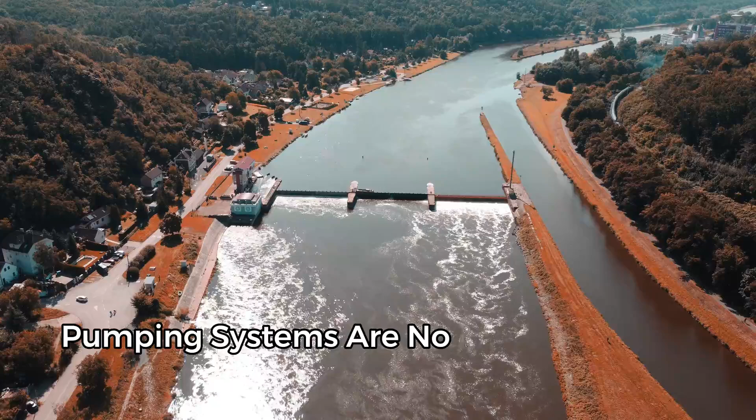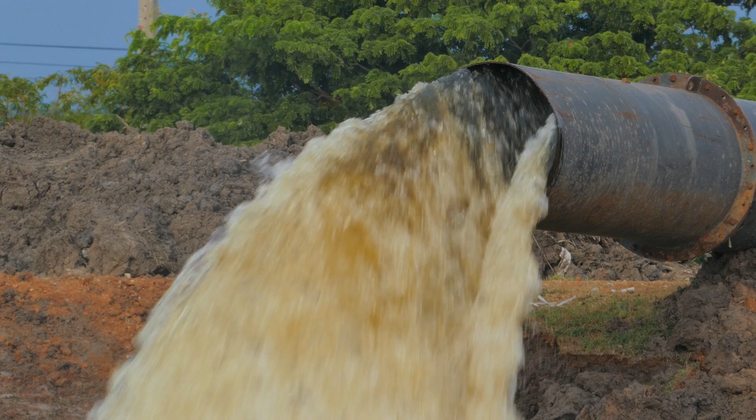Water looks simple when it flows, from a river to a reservoir, from a treatment plant to a city tap, from an intake to a cooling tower. But behind every quiet stream in a pipe, there is a machine working, and behind every machine, there is energy being spent.

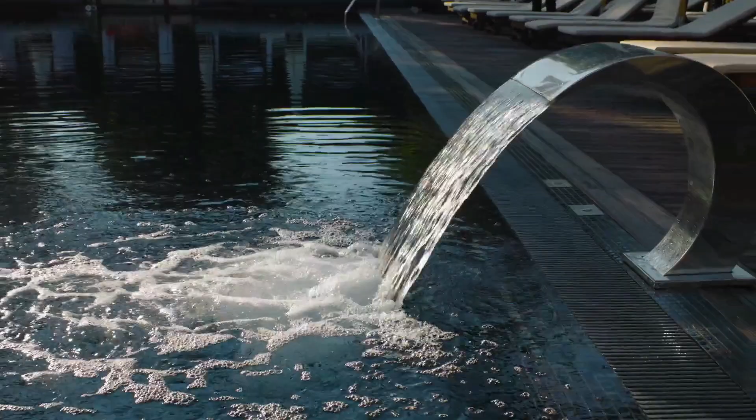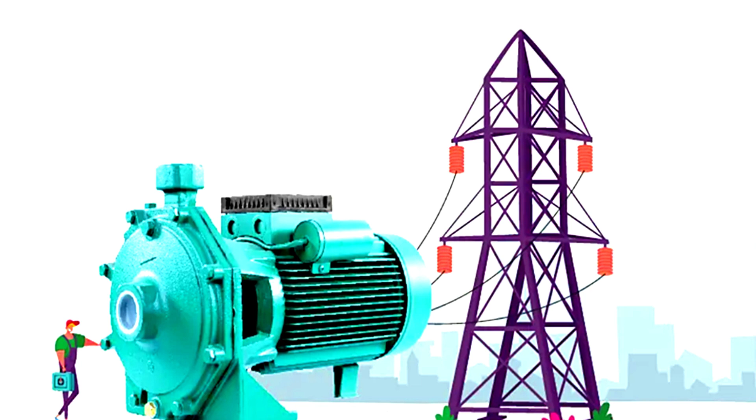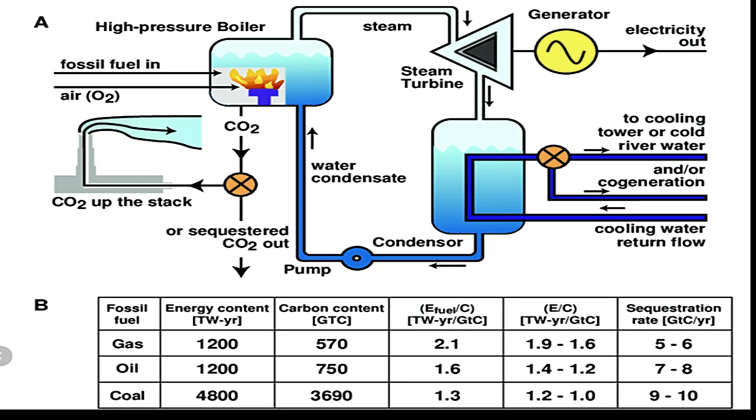In the age of climate change, this hidden energy cost is no longer invisible. Across the world, pumping systems are among the largest consumers of electricity in industry and utilities. They do not make headlines, they do not look dramatic, but they quietly decide how much carbon we emit, how much money we spend, and how resilient our systems really are.

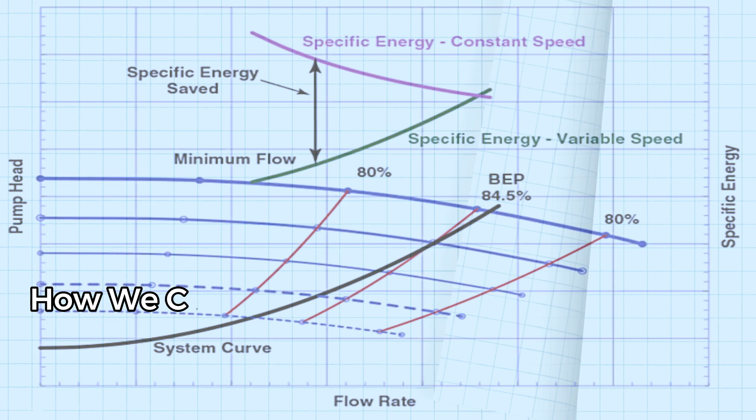Every meter of head, every inefficiency in a pump, every poorly matched motor or control system, every time we throttle flow instead of matching speed to demand, and every time a motor is pushed away from its efficient operating zone, becomes a long-term climate and cost commitment.

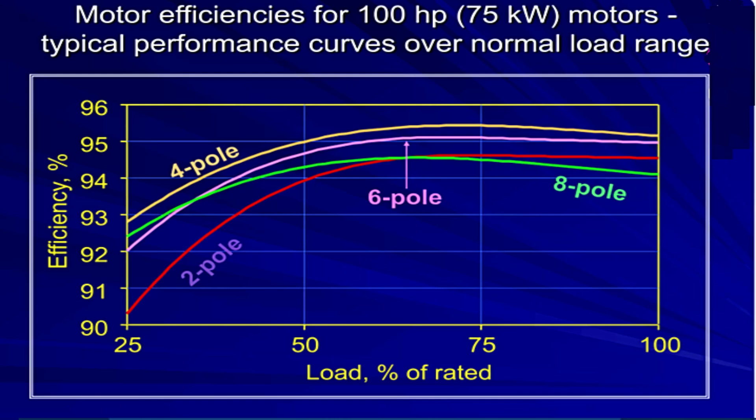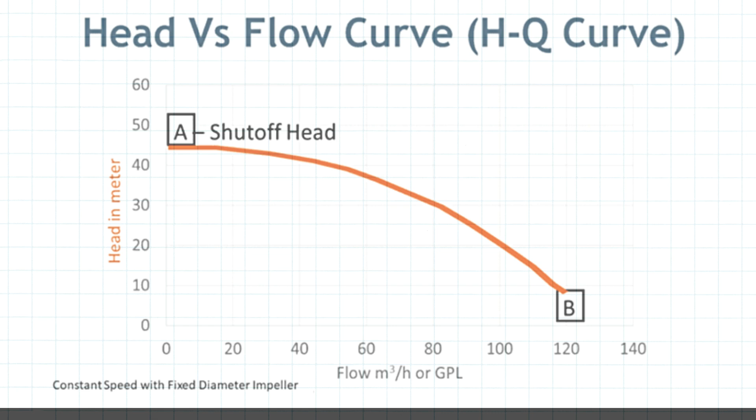Traditionally, we designed pumping stations to move water reliably. Flow and pressure came first. Energy was often treated as a secondary concern. But today, that logic is no longer enough.

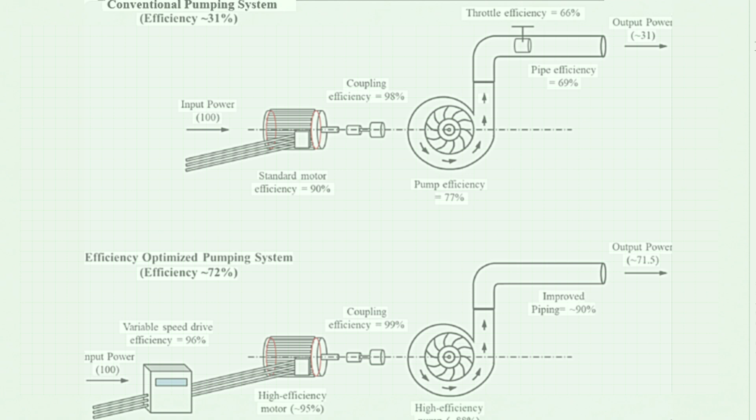Because when climate changes, three things change with it: energy prices, carbon constraints, and system reliability. A pump designed for yesterday's assumptions may work perfectly and still be wrong for tomorrow's world. This is the uncomfortable truth.

Every kilowatt hour saved in pumping is not just an economic gain. It is a climate decision. It means fewer emissions upstream, less stress on power grids, and more resilience when energy systems are under pressure from heat, drought, or extreme demand.

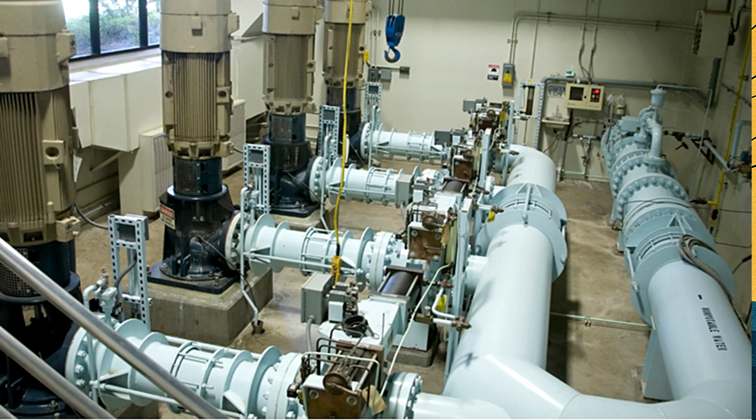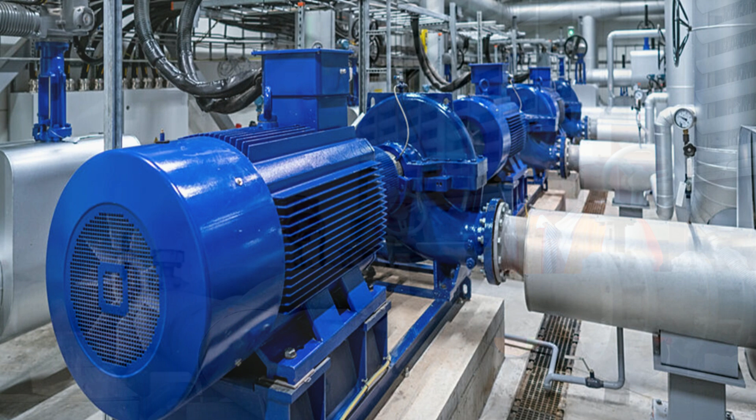In a warming world, water and energy are no longer separate systems. They are one coupled risk. So the question is no longer, does this pump meet the duty point? The real question becomes, does this system belong in a carbon-constrained, energy-stressed future?

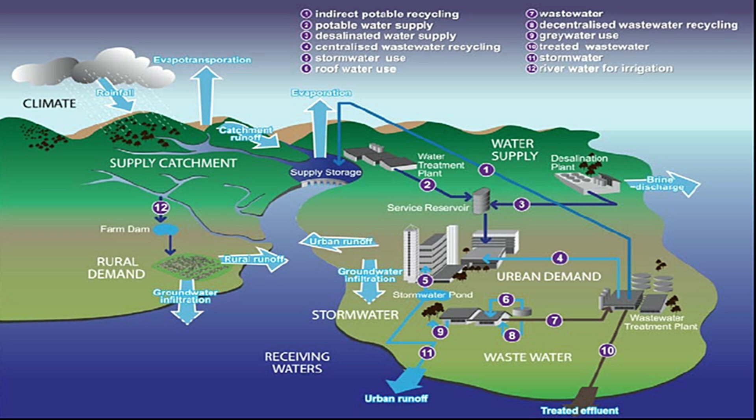Efficiency is no longer an upgrade. It is a form of climate adaptation. Smart controls, right-sized equipment, better hydraulics, and life cycle thinking turn pumping stations from silent energy drains into strategic climate assets.

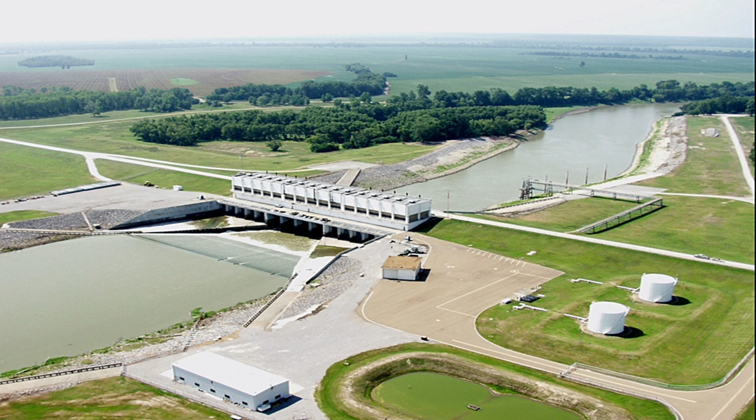If we want infrastructure that lasts 30, 40, or 50 years, we must design not just for water demand, but for climate reality. Because in the end, moving water is also moving energy, and how we move it will shape both our costs and our climate future.

This is not just about better pumps, it is about better decisions. This is Flowline Chronicles, and this is episode 2, The Energy Cost of Moving Water.